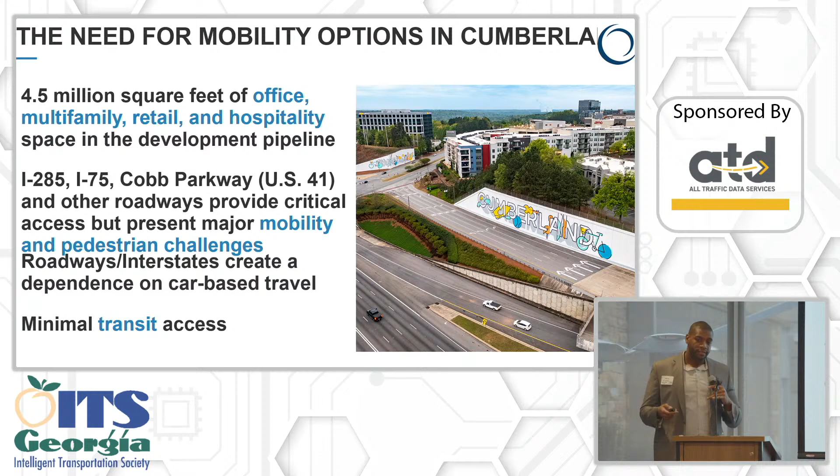So with that being said, back in 2017, when the CID was working on our master plan update, the concept for the Cumberland Sweep was created. This is an introduction to the Cumberland Sweep. The Cumberland Sweep will be a 3-mile multimodal corridor which will connect Cumberland's major employment and cultural entertainment destinations.

Some of those key destinations within the CID that you may be familiar with include the Battery, Truist Park, Cumberland Mall, CEPAC, which is the Cobb Energy Performing Arts Center, as well as Cobb Galleria Center, which hosts many conferences and events, and also the CRNRA, which is the Chattahoochee River National Recreation Area.

Yeah, all right. Just making sure I got that right. Sometimes I mix up the letters, but thank you.

We host two units for the CRNRA, which are the Paces Mill Palisades and the Cochran Shoals. If you've ever done Shoot the Hooch, you'll be familiar with two of these areas that we have within the CID.

So once the Cumberland Sweep is fully built out, it will consist of dedicated lanes for walking, biking, and an autonomous shuttle system. As you can see from this picture on the slide, you have our walkers and bikers on the outside and our AV shuttle lane inside, and then your car travel lanes.

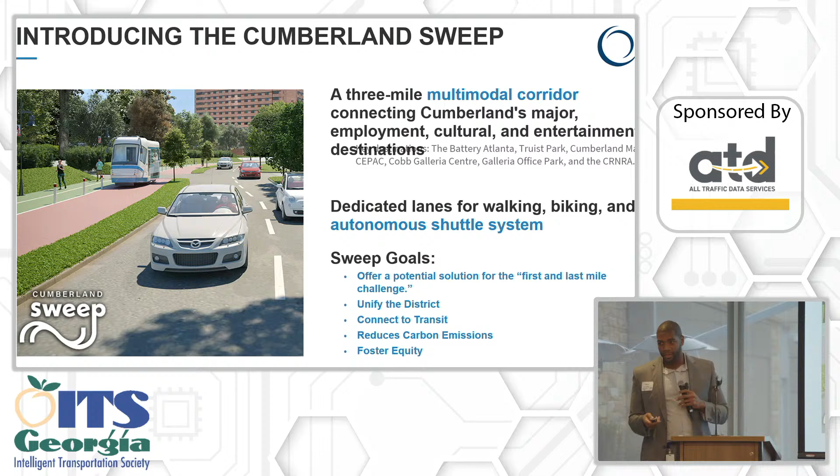This here is an overview map of what the sweep will look like once fully built out. As you can see, we've split it up into 6 major segments along with 2 pedestrian bridges. I'm going to briefly go over these segments and pedestrian bridges, starting to the northeast.

In the light blue, we have segment A, which runs along Interstate North Parkway between Windy Ridge and Akers Mill. Then to the south, we have segment B, which runs along Akers Mill Road. And segment C here in the dark blue, which is furthest along in this process and currently in design, runs through the Galleria Office Park.

To the north of that, in green, we have segment D. This travels across the I-285 pedestrian bridge and also bisects or cuts through the Battery Atlanta. Then to the north, we have segment E in yellow, which runs along Windy Ridge Parkway.

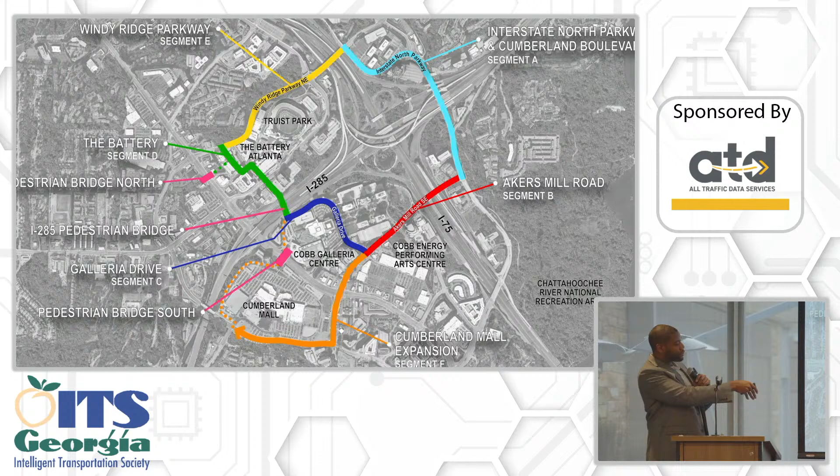From there, to the south, this orange segment runs along Akers Mill Road and then Cumberland Boulevard, cutting in front of the Cumberland Mall, which is segment F. So those are the 6 major segments of the sweep. And if you notice the 2 pink sections, these are the 2 pedestrian bridges that will be going along with this project.

The pedestrian bridge north is basically a concept that was conceived because of the need for better access for pedestrians, primarily traveling to and from the Battery for Braves games specifically. Back in 2021, when the Braves had their amazing run and won the championship, this section of Cobb Parkway was flagged as a major hazard for pedestrians because of all the people wanting to come across, since you have parking here. People park pretty much anywhere - in Smyrna, to the north towards Marietta, and to the south along Cobb Parkway. So Cobb Parkway is very dangerous for pedestrians.

So we decided to include this pedestrian bridge north as a part of this Cumberland Sweep project. It will be a very crucial connection between the city of Smyrna and the Battery Atlanta.

Take your eyes south to the pedestrian bridge south, which connects Cumberland Mall and Cobb Galleria Center. This is an existing bridge that we hope to rehabilitate and turn into a better pedestrian bridge, but also we hope to have autonomous vehicle access along this bridge as well. We're a little ways away as far as the design process goes, but that is pretty much the goal for this.

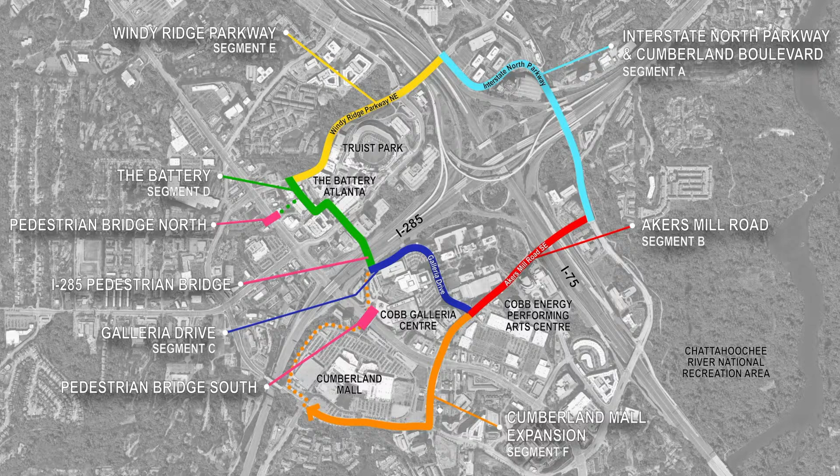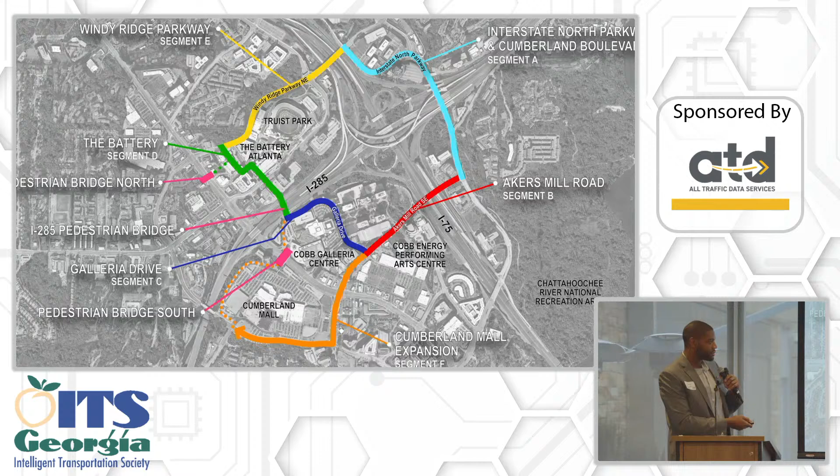As we were going through this project and wanting to build out the AV components of it, we decided to enlist Jacobs to conduct an AV study to give us a better understanding of this technology and how we were to implement it. So now I'll pass things along to Par.

Thanks, Tarik. Like you were saying, in early 2022, the CID partnered with Jacobs to research and summarize the current state of practice of autonomous technologies. Jacobs was enlisted to help develop a concept of operations, a ConOps, once a shuttle has been deployed, as well as assist with operational trainings and other kickoff meetings. The final phase of that deployment plan was to help estimate potential ridership of a shuttle in the Cumberland area.

So the first step we took was to analyze the current state of autonomous transportation in the country. We looked at case studies that had been deployed over the previous couple of years and found a fair number of shuttle deployments that matched the same goals that the CID was hoping to accomplish with the sweep.

A couple of standouts: In 2017, the city of Arlington, Texas launched the Milo shuttle, which ran through an entertainment district containing the Dallas Cowboys Stadium and the Texas Rangers ballpark - that one is pictured on the right here. In 2018, the University of Michigan launched the M-City shuttle, which circulated their North Campus research complex, and that program lasted for 2 years. I'd like to think both of those shuttles were the reason the Rangers and the University of Michigan won their national championship and World Series, but who's to say?

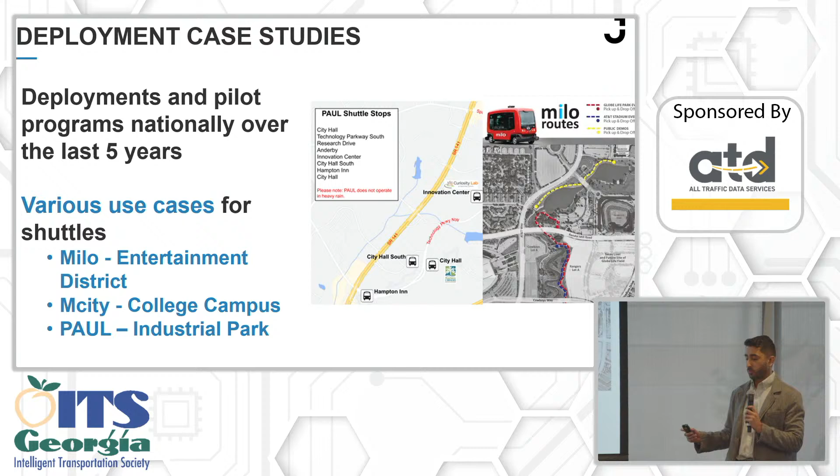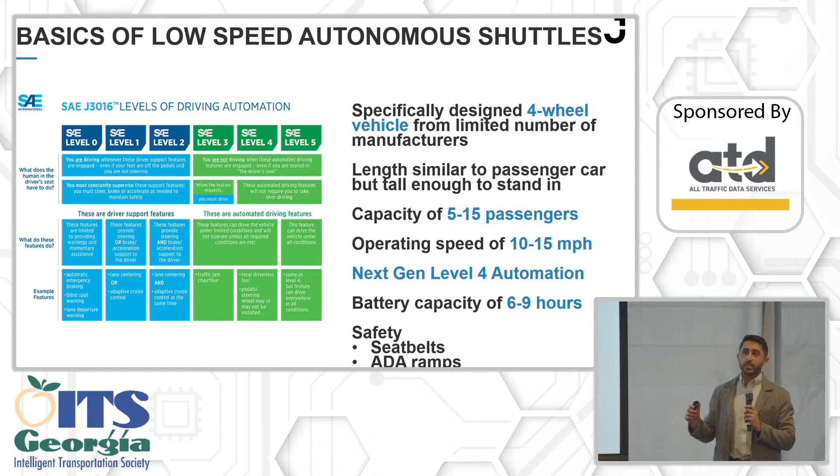One common element between all of these deployments was the specific type of shuttle being used, having a top speed of less than 25 miles an hour, weighing less than 3,000 pounds, and having a conventional layout of 4 wheels. These shuttles were classified by NHTSA as low-speed autonomous vehicles, or LSAVs. LSAVs are typically 12 to 16 feet in length, 4 to 7 feet in height, so about the same size as a passenger sedan, but tall enough to stand in and step into. They typically operate around 15 miles an hour, carrying 5 to 15 passengers, with the ultimate goal of them being able to use level 4 automation to get around.

Level 4 automation means that the vehicle can operate autonomously in certain conditions. The shuttle does not have a steering wheel. The shuttle does not have pedals. This is a step up from level 3, which has autonomous features, but a driver still must take control of the vehicle when asked to. It's a step down from level 5, which can operate autonomously everywhere, all the time.

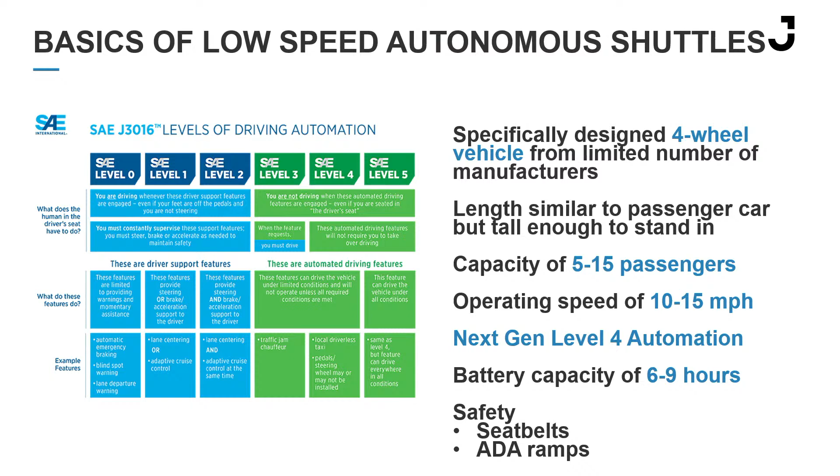The shuttles we looked at have battery capacities of 6 to 9 hours, which can decrease if in extensive use or if they're having to navigate steep slopes, with charge times of around 3 hours using a regular wall outlet. The shuttles also come equipped with seat belts and ADA compliant ramps for wheelchair accessibility.

The most important thing maybe for a successful shuttle deployment was being able to have a well-developed and defined operational design domain. The ODD is the environment and the conditions in which the shuttle operates, including everything from presence of a paved roadway to well-defined pavement markings, visibility, as well as an accurate mapped path. The difference between a good shuttle and a slow-moving brick is having an ODD that is clearly defined.

Other factors that are important for a good ODD besides pavement markings are fixed fixtures, like fixed features along a route that a shuttle can recognize. Adequate separation from adjacent traffic if you're operating in mixed traffic, or on a pedestrian path from cyclists and other pedestrians. And then the shuttle operates in its ODD by a combination of LiDAR and radar sensors and onboard cameras.

The LiDAR and the radar are able to determine objects and ranges to create a virtual environment. That virtual environment is compared to an accurate mapped path drawn before the deployment. That comparison allows the shuttle to identify any obstructions or anything that's different from what it's normally expecting out there. The onboard cameras can provide real-time route conditions, as if it's raining or if it's getting a little too dark out there early. And then GPS can just provide location and speeds.

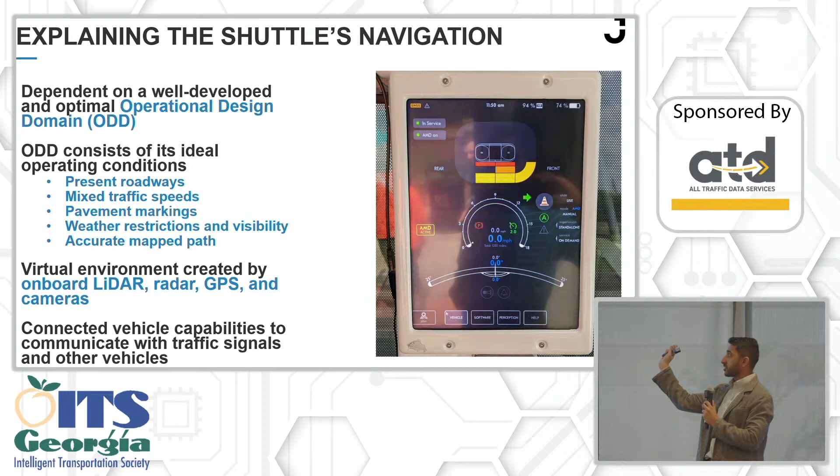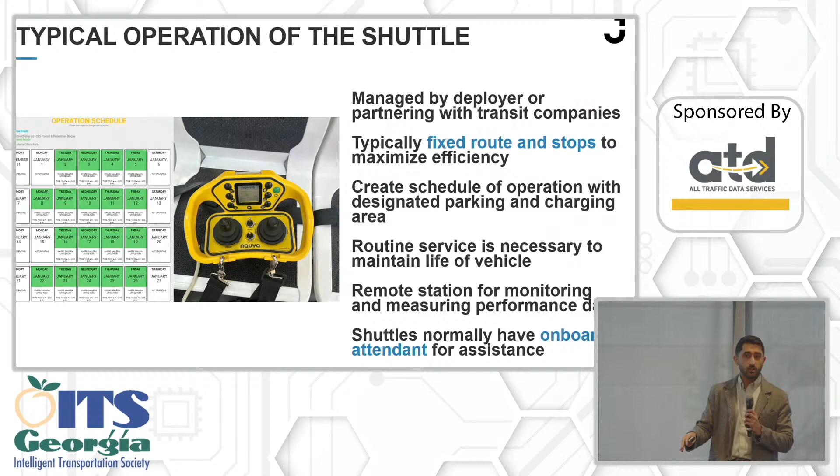Once deployed, day-to-day operations can be managed by the deploying entity or by partnering with transit service partners. The operations include hiring and training of staff, setting a route with stops, and determining a normal schedule of service. The picture on the left shows just an example of a typical schedule. In this case, the shuttle service is running on weekdays at a fixed time while taking holidays off, because shuttles are doing a hard job and deserve a break as well.

Also as important to that is finding a secure place to park and charge your shuttle. It is not a short vehicle. It is an expensive vehicle. Having a dedicated space where you know it'll be every day locked away is important, as well as routine maintenance of the shuttle. It's not a normal internal combustion engine, so you don't have to worry about engine oil changes, but it still has other components such as brakes and tires and moving parts that you would expect.

Often in deployments, there is a remote station or a command center where operators can monitor the shuttle, check at which stop it's at, see how fast it's moving, check the battery life of it to see if it's time to come back for a charge. As well as those operators can reach out to emergency personnel in case there is something that arises, such as law enforcement or fire departments.

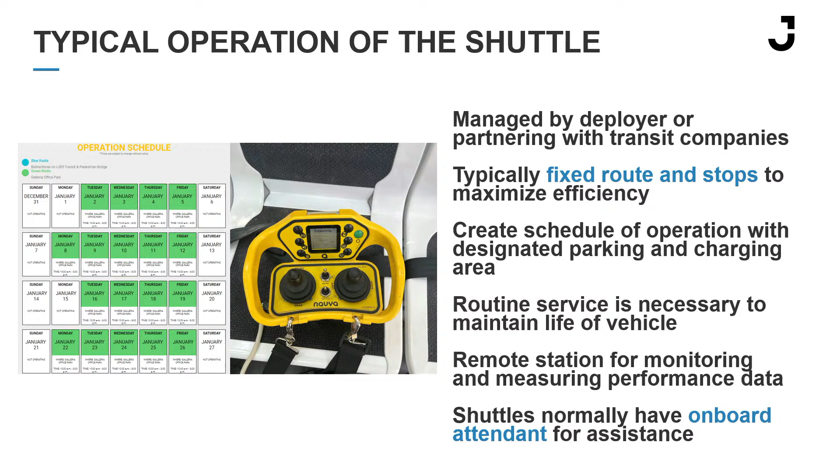And while the shuttle is autonomous and doesn't require a driver, most deployments will have an onboard attendant. That onboard attendant, in certain scenarios, can take manual control of the shuttle using controls similar to the picture on the right, which can stop and start, steer, turn on the wipers, the lights, and access the doors. Outside of requiring manual operation, the attendant is also there to ease the passengers and facilitate getting on and off the shuttle.

During our study, we were actually invited, CCID and Jacobs, as well as members of Cobb County and GDOT, to visit BEEP headquarters in Lake Nona, Florida, just outside of the Orlando airport. BEEP is a service mobility provider with a local AV deployment in Lake Nona. So we toured their command center and got a little look into how they operate their shuttle deployments across the country, as well as watch presentations from their executives and client managers on what makes a successful deployment.

Another phase of our study was an estimation of potential ridership for any shuttle in the Cumberland Sweep area. Our team used an Excel-based estimation tool designed by Jacobs for smaller system transit use, originally for an autonomous project in Dallas. The tool uses the first three steps of the traditional travel demand model.

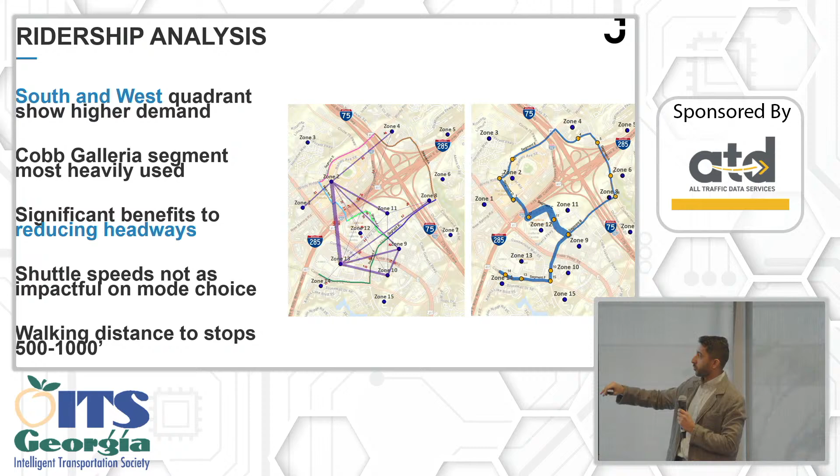If you look at the figure on the left, you'll see desire lines for different origins and destinations, with those two popular locations popping up again. On the figure on the right, you'll see the potential route layout weighted for trips. You can tell the most utilized segment is the one running through Cobb Galleria, as riders take that segment onto their final destination. That really defined this segment C as the spine of the Cumberland Sweep.

As a result of the mode split, we found the most significant impact came from having shorter headways—riders would not want to wait too long at a stop for another shuttle to come. To a lesser impact, shuttle speeds had less of an effect on ridership, because a lot of the trips these riders were taking weren't terribly long.

One final result was that having these shuttle stops within about 500 to 1,000 feet of walking distance of popular points of interest is advised, as otherwise other modes will be selected.

So we took all of these results and findings, put them together in our three-phase study, and provided them back to the CCID. Then Tarik will talk about the results of what came after that. Thank you, Park.

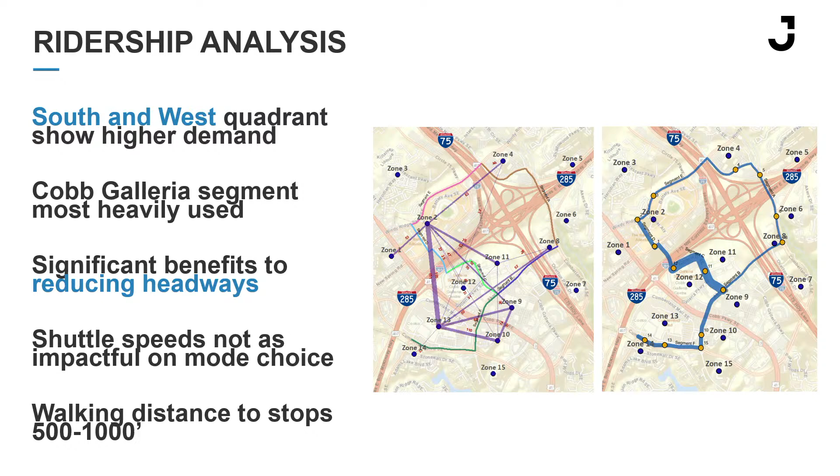We began the program back in July of 2023, and we will culminate this program in March 2024, specifically March 22nd. So if you haven't ridden the shuttle yet, please make sure you get out there by March 22nd.

Last year, as Jacobs was conducting this study, we were culminating a partnership with Beep, which is a national leader in AV technology and operations. Beep is the company that operates and maintains the shuttle, while Navya is the company that manufactures the shuttle.

The pilot program consists of two deployment routes, one being along the I-285 Transit and Pedestrian Bridge, and the second route running through the Galleria Office Park.

As I said before, the shuttle itself was manufactured by a company called Navya. They're based out of France. This shuttle is an 8-passenger shuttle, travels at a max speed of 15 miles per hour. And yes, there are seat belts.

I know traveling at those speeds makes some people uncomfortable, so there are seat belts for you. The shuttle also operates with an attendant on board due to the technological and regulatory restrictions at the time. An attendant has to be on board at all times, and the shuttle operates on GNSS technology.

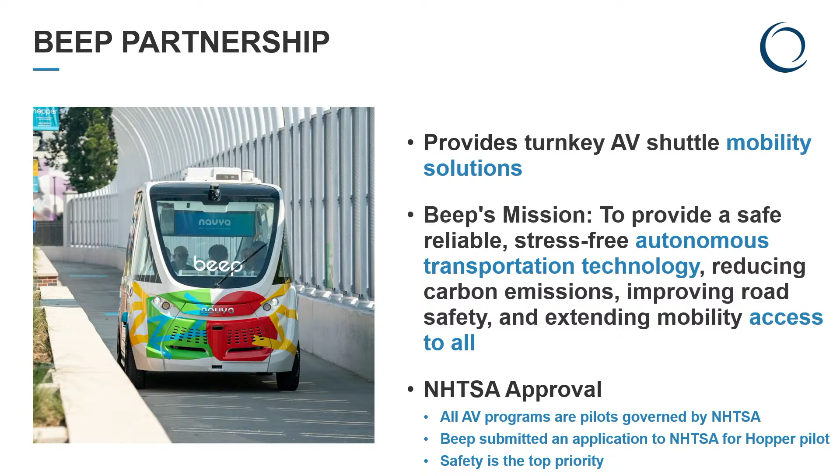Now a little bit about our partnership with Beep. As I said, Beep provides turnkey AV shuttle mobility solutions for different local governments and organizations across the U.S. They're headquartered in Florida, so they have about 4 or 5 programs going there. They also have us, the Cumberland CID, Peachtree Corners, and I believe an ongoing pilot program in California.

BEEP's mission is basically to provide a safe, reliable, stress-free autonomous transportation technology, reducing carbon emissions, improving road safety, and extending mobility access to all. Their mission is to get this technology out there and get people familiar and comfortable with it, because they recognize the benefit it has for public transit.

Throughout this process, NHTSA approval was very crucial. All AV programs are technically considered pilots as far as NHTSA is concerned. BEEP submitted an application to NHTSA for our Hopper pilot. Since they're an AV company, they're very familiar with this process, so we left it in their hands, gave them all the information, and they were able to get our pilot program with our 2 routes approved through NHTSA. Safety will always be a top priority for NHTSA dealing with these emerging technologies.

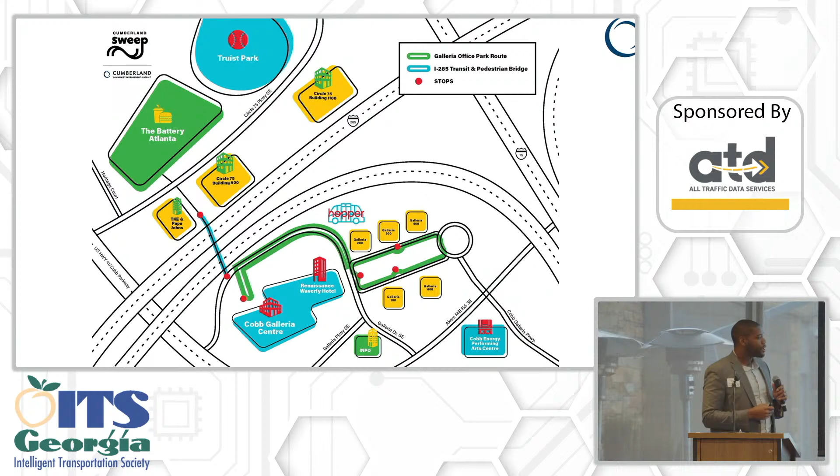This here is a map of our current pilot program. You'll see the 2 routes I referenced earlier. First we have the route in blue going across the highway, that's the route along the I-285 transit and pedestrian bridge - our primary route. We used this route heavily when we initiated the program last year because of Braves season, since a lot of fans park in the Galleria and come across the bridge, so they were able to experience the Hopper and this AV technology.

Our secondary route, the green route, runs through the Galleria Office Park, taking people to and from their offices and up to the bridge, since we noticed a lot of people traverse across the bridge to get to the Battery for lunch or events.

We used the data Jacobs provided through their study to recognize these high traffic volume areas, to see where we'd get the most ridership when we implemented this program. Not only did we consider the high traffic volumes, but as you can see along Galleria Drive and across the I-285 pedestrian bridge, that's our planned segment C and segment D. So we're able to get information on how this AV shuttle would operate in the future once the sweep is fully constructed.

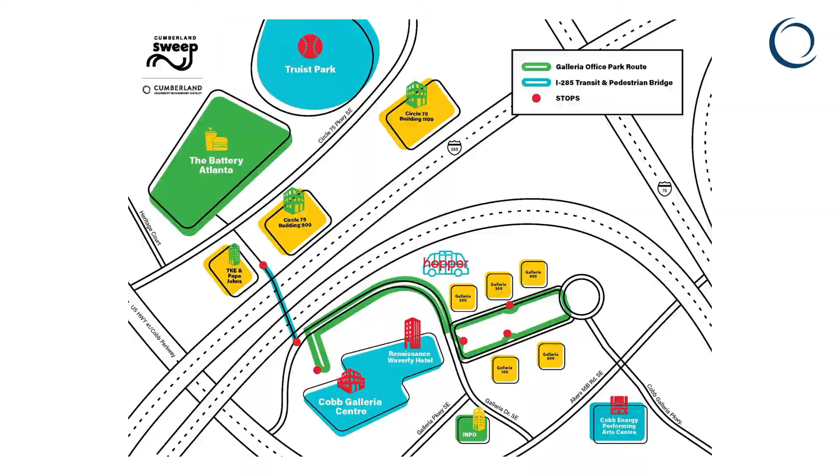When the bridge was initially constructed back in 2018, it was created to be, as it's named, a pedestrian and transit bridge. But since then, transit has never operated on this bridge until now. As we were going through our approval process with NHTSA, we had to ensure we informed the public about how this bridge is to be utilized in the future. We not only have basic marketing signage for the Hopper and the sweep itself, but some signs serve a dual purpose.

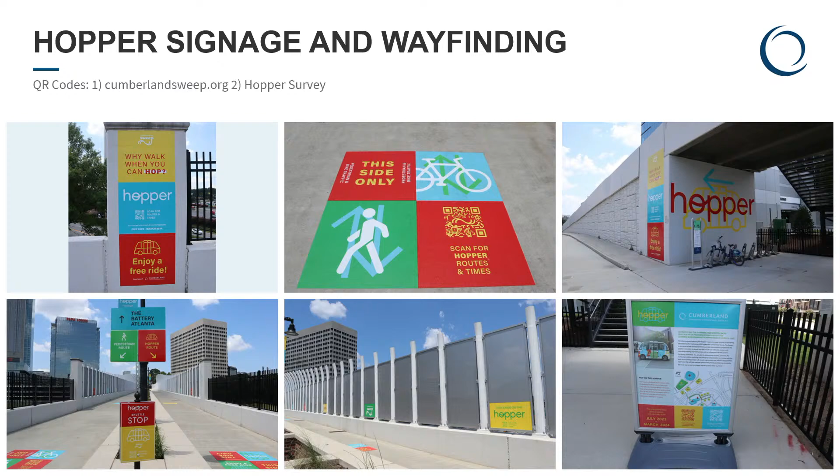The sign you see in the top middle here says 'this side only for pedestrians.' This is a sign on the pedestrian side, and the other side is for the Hopper route. This is to ensure pedestrians know they can only walk on this side because the AV shuttle is going to be coming up and down this bridge every now and then. And yes, it is AV. It's not going to run anybody over, but it's important to make that distinction as people use the bridge on a daily basis.

Most of these signs depicted are along the I-285 transit and pedestrian bridge, but we also have informational signs and station stop signs going through the Galleria for our alternative route, the green route, that goes through the Galleria Office Park.

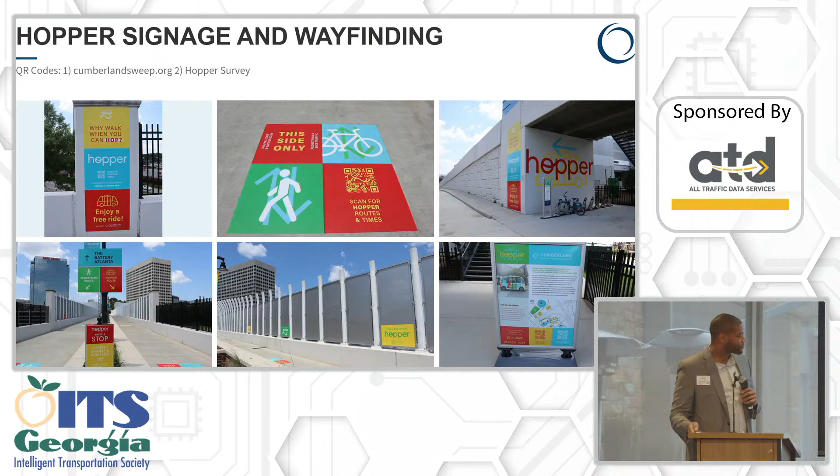Since we started this pilot program, we have experienced over 4,000 riders, about 4,350 to be exact to date. As part of this pilot program, we also offered a survey to anyone that rides.

Through this survey, we were able to gauge the public's perception of this technology and of the Hopper itself. 97% of those surveyed said they felt safe, which is always a big concern when introducing this type of technology. Not a lot of people feel comfortable utilizing these types of technologies. But 97% of those surveyed said they felt safe, as well as 97% said they support seeing autonomous shuttles in Cumberland, which was amazing to see given where we expect this project to be once the sweep itself is fully constructed.

I want to take the time to say that segment C, going through the Galleria Office Park, is the segment that's furthest along in the sweep project. It's currently in the design phase, and we hope to go to construction on this segment by 2027. We're continuing to work with our property owners as well as our engineering firms to do this design to get to this 2027 goal.

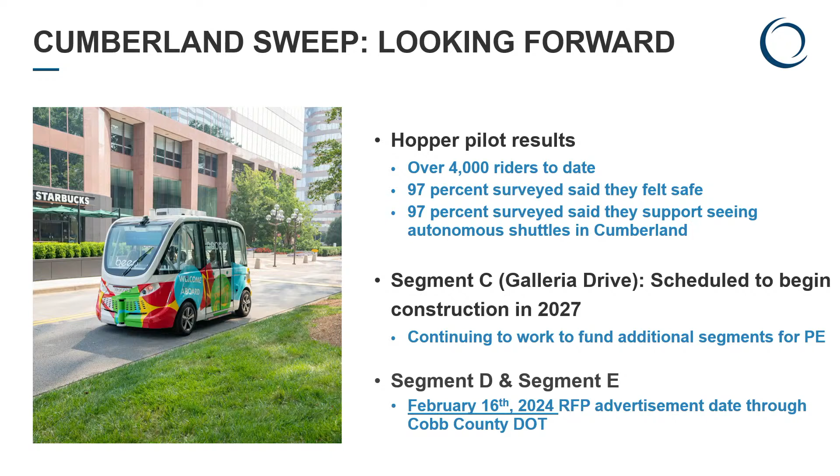Next up will be segments D and E. So I want to put that plug out there for anybody who might be interested in getting in on the design process of this project. Cobb County DOT is putting this project out for bid on February 16th. So anybody interested in bidding on this project, or who knows anybody interested, this will be our next segment going out for bid as we push this project forward.

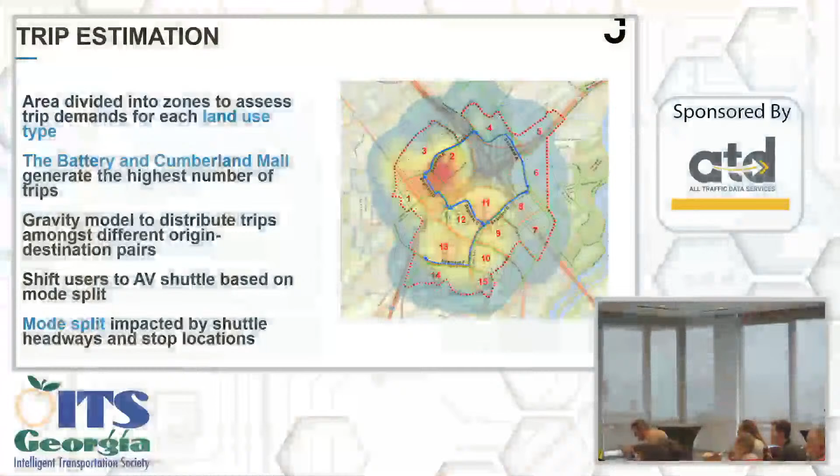I'm interested in this map here. So the darker areas, like 2 and 13 you were mentioning, that's where the most demand was derived from. Was that employees or residents, or how did you calculate that demand?

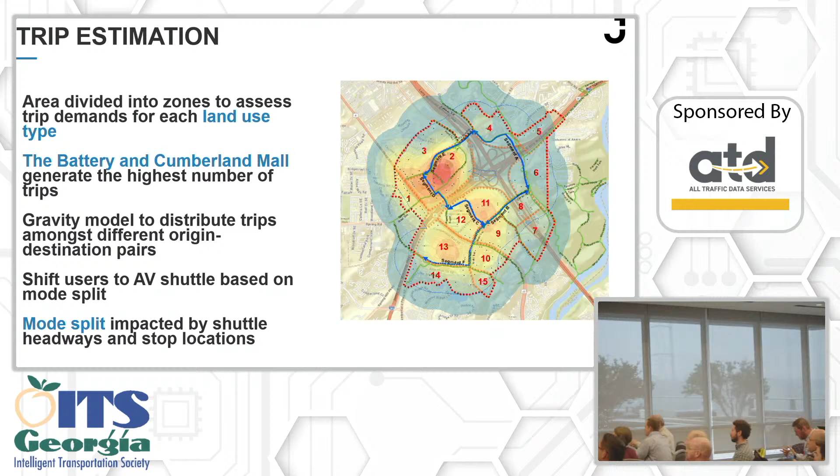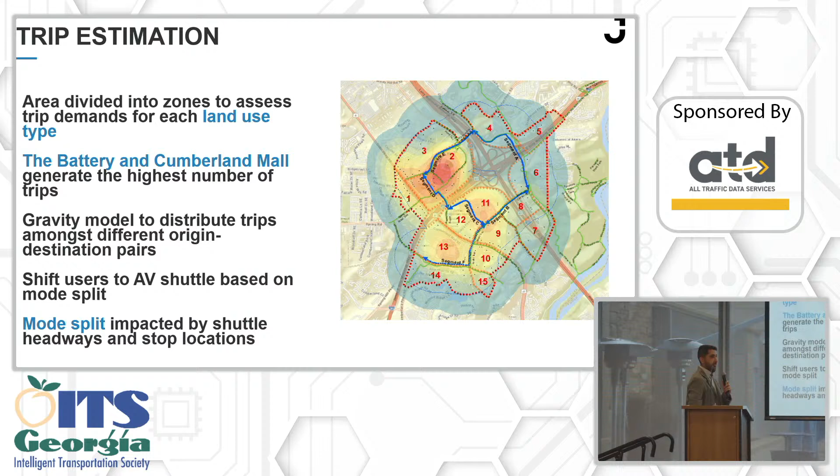Trips once filtered for people we thought would use the shuttle — trips that start and end in Cumberland and are leaving one zone to go to another. So it's not a lot of home-based work trips or the reverse. This is, in my mind, mainly people visiting the Battery and then the mall, or people who work in the Galleria and then go to lunch in the Battery. The highest trips generated — the businesses and restaurants with land use codes generating the most trips — were mainly found in zones 2 and 13. Thanks for your question.

Yes. Can you re-show where we can ride on it right now? And what is the frequency of trips? I'm asking where we can ride on it right now, and what's the frequency of trips?

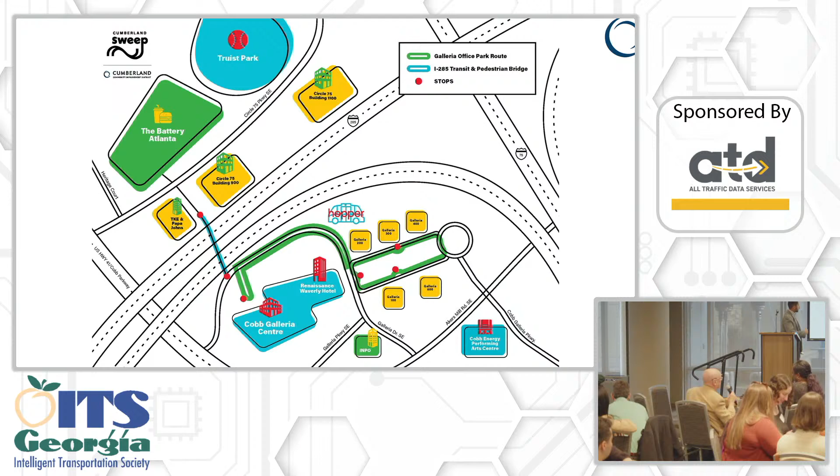So as I said before, these are the two pilot routes that we have going on right now. There is a schedule that we update monthly or even weekly, depending on any events or occurrences that may happen. Occasionally the shuttle may go down, so we'll send an alert out saying operations are shut down for today.

My apologies for not mentioning it before, but CumberlandSweep.org is our project website, and on that website you'll be able to find a schedule for this route. Essentially, we will operate on one route or the other per day — we won't operate on the blue route and the green route together. It's one route on any given day.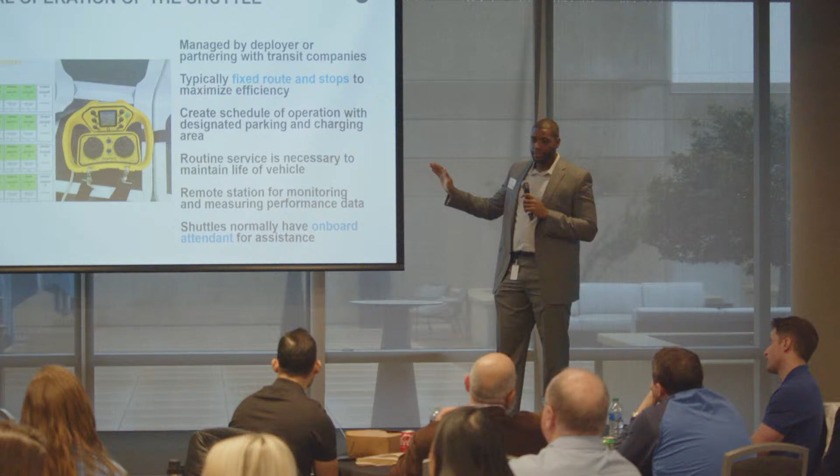The typical time frame, I know we do 5 hours — it's about 10 to 3. That's what we do right now, and we operate 5 days a week. The schedule shown earlier only showed it operating through the weekdays, but depending on the month and the events we have going on, we also operate on the weekends. So if you check the schedule right now, you might see a completely different version of it.

Also, what I failed to mention earlier — if you see these QR codes posted on our signs all throughout the blue route as well as the green route, scan these QR codes and it will take you to that site and to the schedule, so you can stay up to date and see when the shuttle is on route.

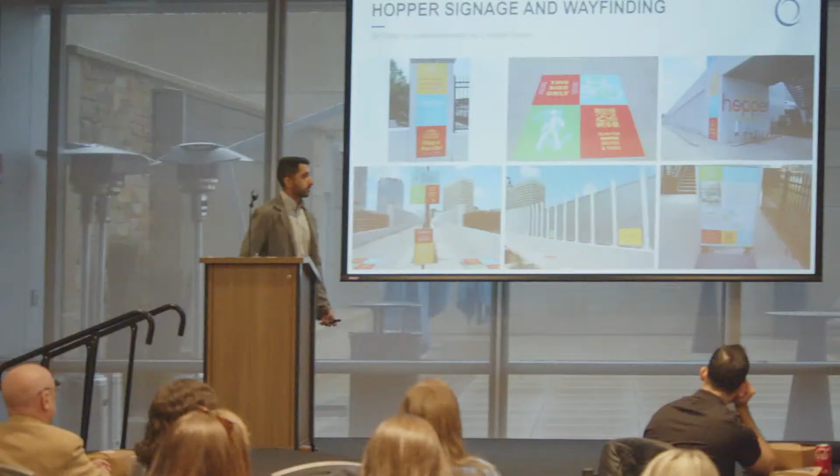This is a non-technical question for Tarik, since you said you weren't a tech guy. Last I knew, because I live right outside the CID, the mall and Galleria were not very helpful with parking for Braves games. Are you guys pursuing a policy to encourage parking in those places? As a part — no, we are not. I know parking can be a touchy issue, but I think that's pretty much up to the property owners themselves in dealing with that.

Any more questions? Anything? Oh, two. Give me a second. Oh, I have a pretty loud question. Kind of a random question. Go ahead — does the shuttle accommodate strollers? I have a baby stroller. Does it accommodate strollers? Is it big enough to accommodate one?

Can you go to the last slide? Okay, well, so it does accommodate strollers. The shuttle, as we see now, is an 8-passenger shuttle — well, technically 10. One of our board members has a funny anecdote: the shuttle is manufactured in France, so it technically fits 10 people, but it's European proportions basically. That's why when giving this information out, we pretty much say 8.

So given the amount of people that are able to ride — I don't know, you can't really see from here, but the seats go all around the outside. There's 3 seats in the back, I think, and then 4.

If you go to the next slide — that one, yeah. So here you can see pretty much how people are seated, around the back and to the side and then around the front. Also, along with strollers, it can accommodate wheelchairs — it has a wheelchair accessible ramp. So in the middle, you have that somewhat open space that will fit a stroller, wheelchair, anything like that. So, yeah, you're welcome.

I was just curious how you coordinated with Cobb Link and Cobb DOT on this project.

Cobb Link we did not have to coordinate with, but Cobb DOT, yes, we did for the project. So part of it, if you go back to my route - the I-285 Transit and Pedestrian Bridge, the blue route - this is owned and operated by Cobb DOT, so we did have to get permissions. I forget the actual term for it, but pretty much we had to get Cobb DOT's permission to access and ride along this bridge. It was pretty much a process where we submitted what our project is and how we plan on operating it. Through those conversations, we were able to get that access from Cobb DOT.

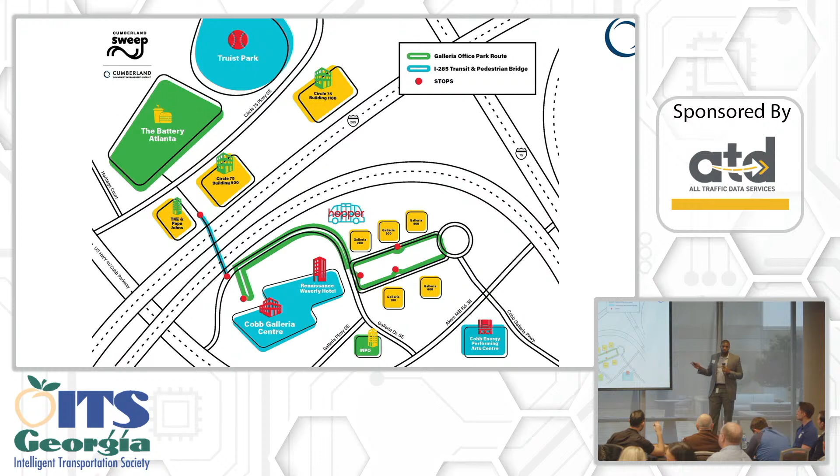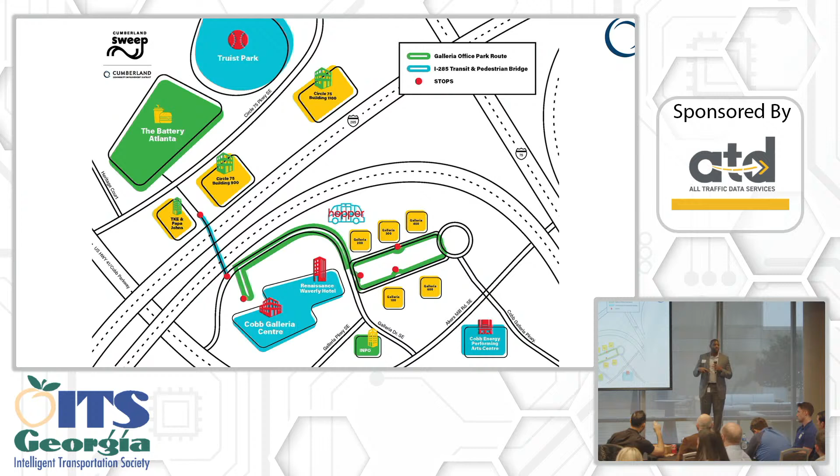Now, when it comes to the green route, this is technically a privately owned road, owned by Piedmont Realty, who owns the Galleria office buildings. So that was a slightly separate process where we had to go through the same process with them, explain our project, what we're doing, and ask if we could operate there. That was pretty much the process we had to go through.

Welcome. They're recording. Sure, why not?

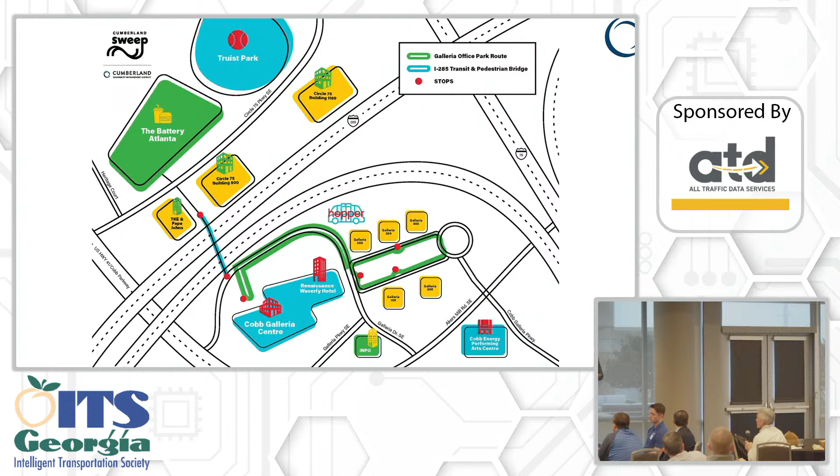If you could go back to one of the first slides where you had all the colors, the clockwise route for the whole thing - for the sweep. I had a question, apologize if you said this and I missed it. How much of this is on existing public collector roadways, or is it all on a separate pedestrian multi-use access route? I'm thinking about interaction with traffic and speeds. As background, I live in Peachtree Corners, I'm aware of the Olli system, the autonomous shuttle, and I see the routing and markings for that. This is obviously a little more robust, so I'm curious how that would work, especially on the blue route, if there are side streets or not.

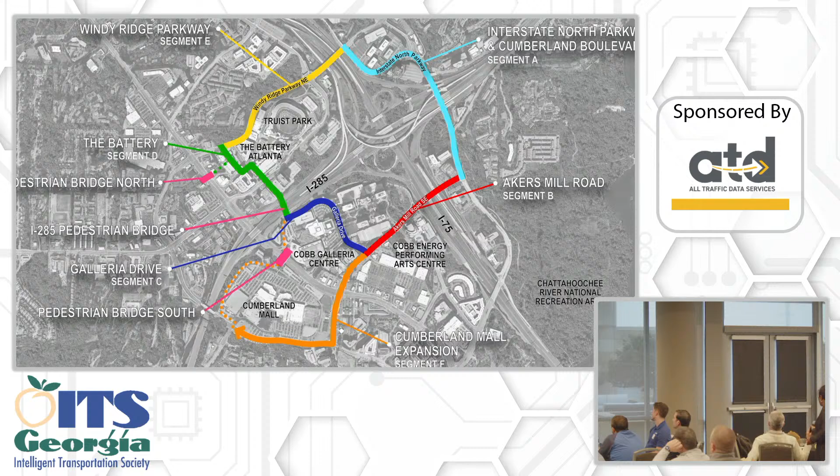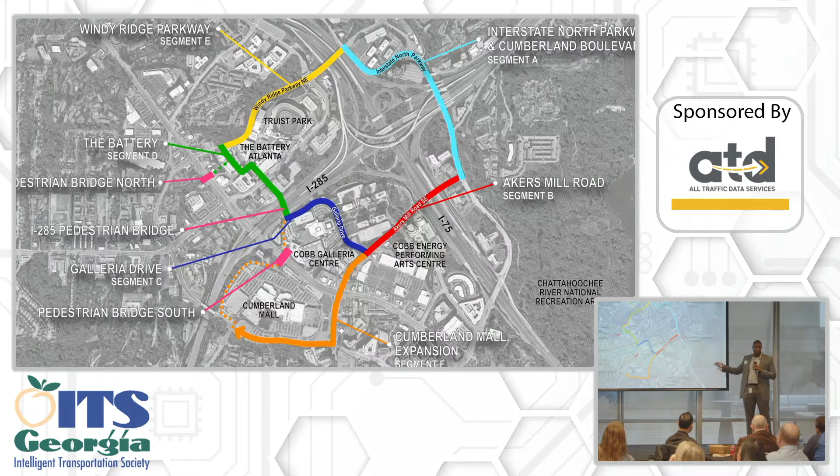Yes, that is a great question. To answer it, essentially all of these routes are along public roads. But when we go through the design process, another thing to factor in is that the shuttle on route now will not be the shuttle on route when we launch the actual project in 2027-2029. There's a company planning to begin manufacturing a shuttle in 2025 that will have top speeds around 35 miles an hour. Given the design parameters, once we're able to have those conversations, there are a lot of segments where the shuttle will be running in the lane with traffic - that's also an NHTSA approval process we have to go through. So it'll either be in lane with traffic, or we'll have a dedicated lane, as I showed in one depiction. Here the shuttle has a dedicated lane, but for segment C, we plan on running the shuttle in lane, while on the yellow route we plan on building a dedicated lane so it doesn't have to run with traffic.

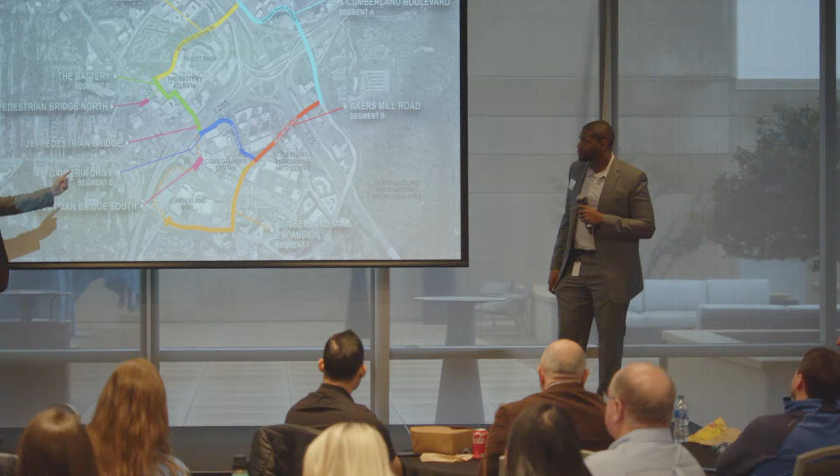The pilot program route that runs along Cobb Galleria currently runs in mixed traffic, correct? Yes, it does - the green route runs with traffic.

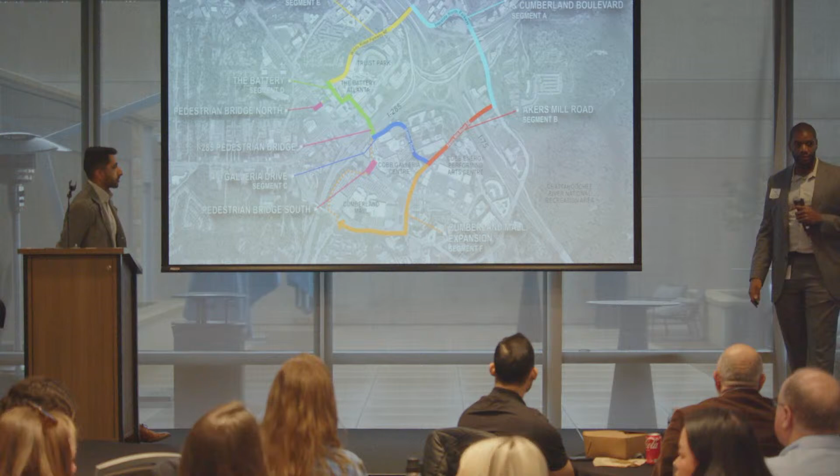That's correct. And to further clarify, the Galleria Drive is the only private road that we would operate on - all the other roads are public right of way owned by Cobb DOT. When we come across segment F, having to cross Cobb Parkway, we'll have to begin conversations with GDOT for the state, because we'll be operating along state right of way, and they'll have to go through traffic signals and all that. Yes, it's a long way to go.

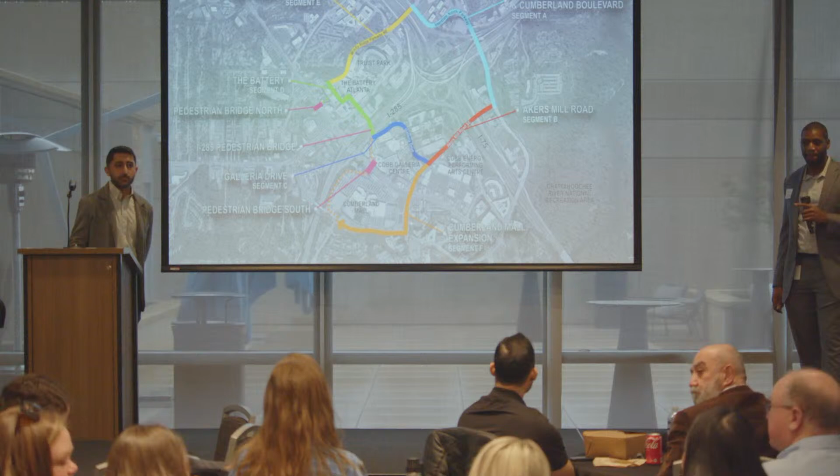All right, anybody else? No? Good? All right, well I think that's it.